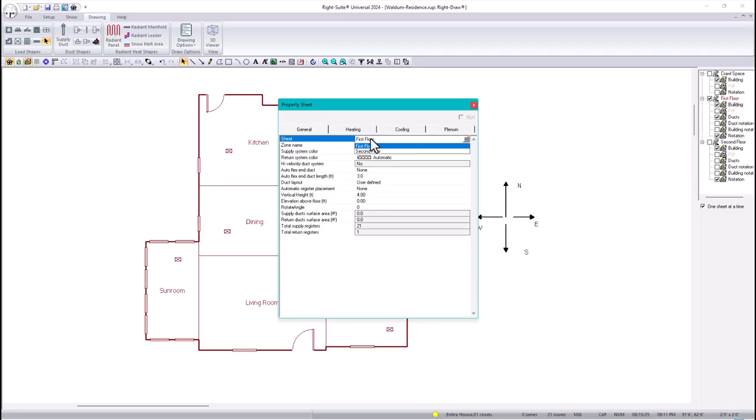So how are you going to put it? If this system is not in the crawl space, there's no way you can show or run ducts in the crawl space. There's no way, there's no option. See, I'm going to go here - first floor, no, second floor, no. Okay, let's put it on the second floor and see what happens.

See? Now it's on the second floor. It's not on the first floor, it's not on the crawl space. I want it in the crawl space. Okay, so there's a trick for that, and I'm going to show you that, and I'm going to make a video about tips and tricks for that too.

So the trick is the following: why is it not giving me any crawl space option? Because this crawl space is not conditioned. If you go here to the worksheet, see in the worksheet, what's my square footage? My square footage is 1910 square feet, because it's not including the crawl space.

Let's go double check again. Let's go to the crawl space, then go here, right click. It says including the calculations - no. As soon as you put including the calculation - yes - it's going to count this area for this square footage. Let's go check - including the calculations, yes. And then you're going to hit enter, okay, and go back to the square footage.

Oh, wait a minute, now it's almost 3,000 square feet. So that's not good, and that's not accurate, right? See, do you see entire house? It's the room area, 2,949. And let's go checking here. Wait a minute, that's not right, number one.

Number two, can I put my system in the crawl space now? Let's see - you're not going to be able to. Let's go check, second floor - no, it's not there yet. Oh my gosh, that's not good. So what happens is there's no reason for your system to be there. Why?

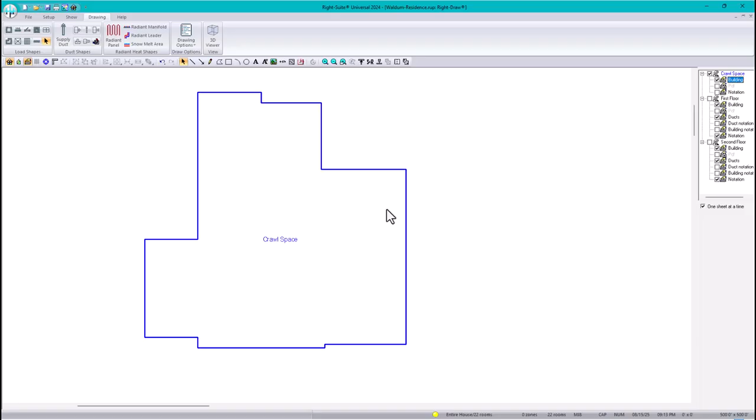Because the reason is this room is not conditioned. If it's not conditioned, there's no reason to be there. So the reason it's not conditioned is in here. Room heating conditioning, none. Room cooling conditioning, none.

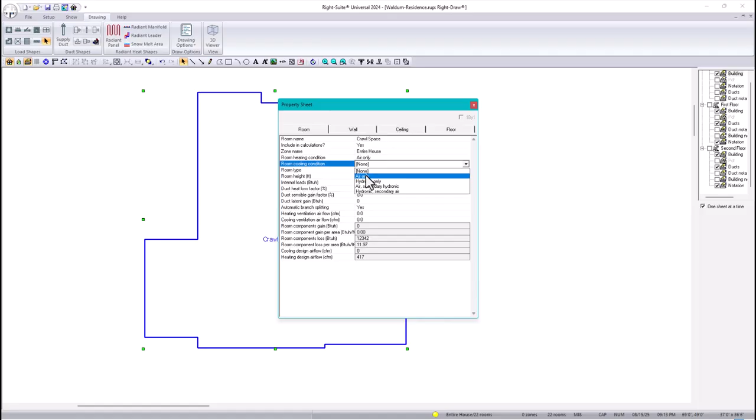So the trick is, number one, in your crawl space, you have to put including the calculations, yes. Room heating condition, air only, or whichever. Room cooling condition, air only. Okay, all right, there you go.

I understand this is not good because the entire house is going to be now almost 3,000 square feet. That's not right, but this is a trick. So let's go back again and check on my system if I can put it on the crawl space.

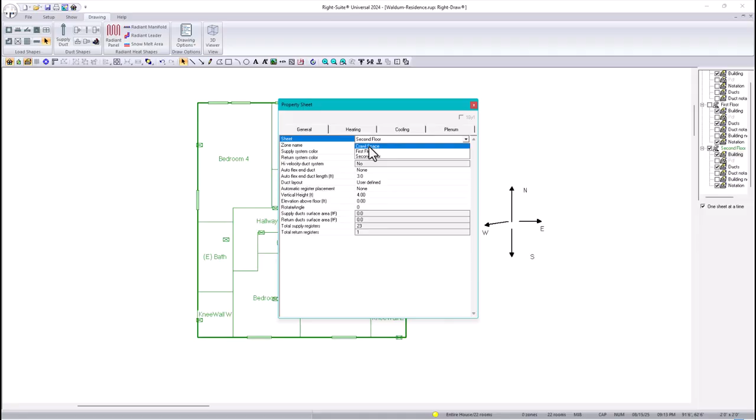I go click, second floor. Oh, look at this, the crawl space is right there. That's very good. So let's put it in the crawl space. There we go, and then hit enter. And now my system is in the crawl space.

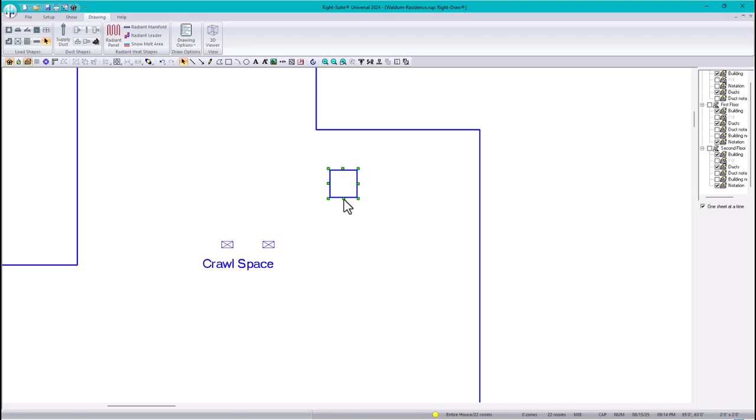Now secondly, what you're going to do is the following. In the crawl space, you need to make sure that this is looking good. I'm going to put it like this, and then make it a little bit longer. Let's see if I can make it longer. I'm going to pull this down like this. No, let's go here, and then go with this, go here, like this. See? Now I'm going to make it longer.

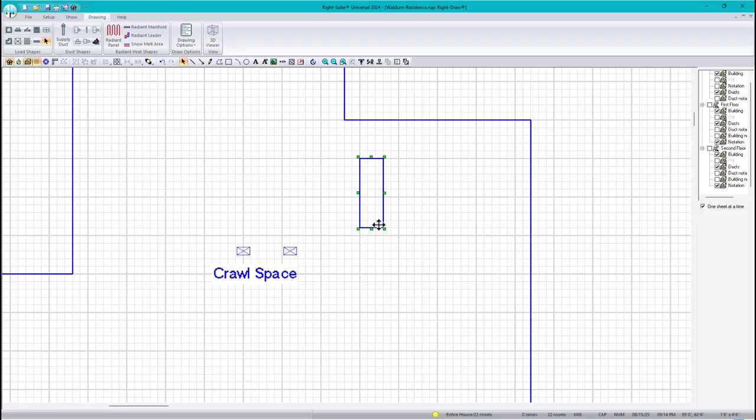So that means, or that represents, that my unit is in a position that is horizontal, right? There you go, you see, there we go. Okay, so now that my unit is horizontal, I'm going to get rid of this.

Now I could play with my ductwork because, see, in the crawl space now you have the notation, you have duct notations. Oh my gosh, look at this, it's giving the CFM needed in here. All right, I'm going to go delete this.

Okay, so in the crawl space we have that. I'm going to make this a little bit bigger. There you go. So in the crawl space you have register grills, which is not right and is not accurate.

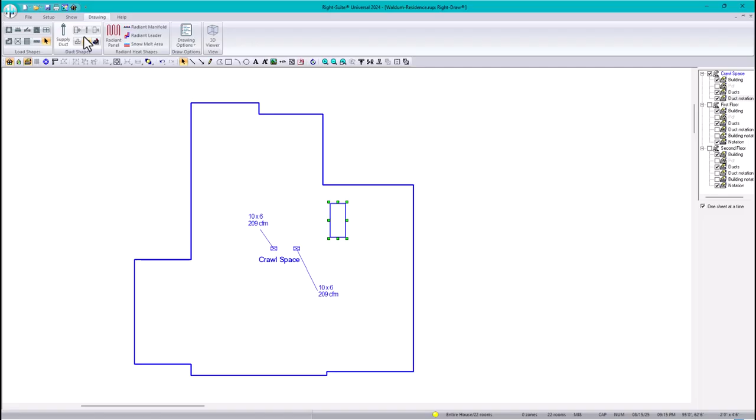But if you do this, for example, if you want to run a duct, go here. So this is the supply. Let's go like this, or maybe like this, whichever you want. So maybe you're going to make it like this. And then look at this. It doesn't connect actually.

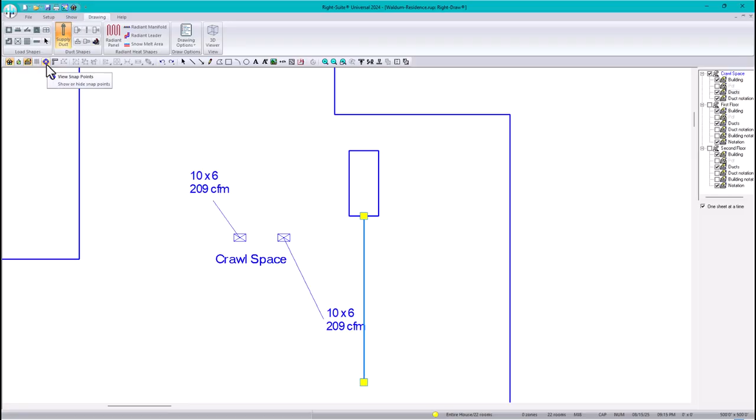Let's see, go back, and then go here. We need to, so this is what is called snap points. Snap points actually help us a lot. So I'm going to put a snap point, and I'm going to make my grid in here. No, not my grid, it's called a grid. So let's go here, and then look at this. We got this, and then it's there.

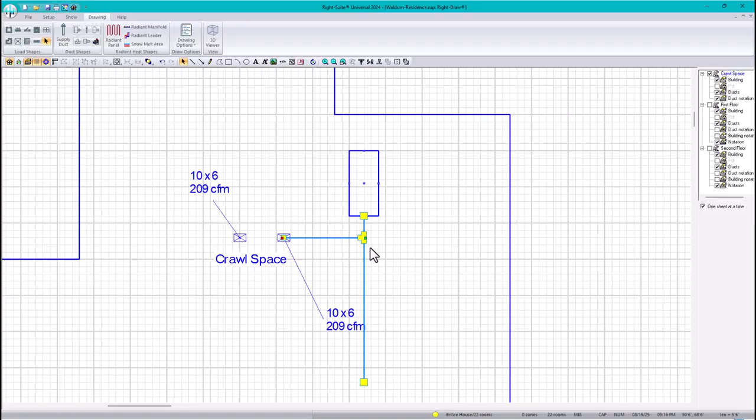Now it's not connecting. It could be like maybe some sort of, what is it called, a glitch. But let's go check again. If I do this, I do that, it's not connecting again. Oh, because I don't have a return in here. I don't have a return, I don't have anything. So I need to play with this a little bit more. It's a little bit more tricky, but that's not the point. I'm going to have other videos for that, to play with this.

But the reason is what we have to do in here is the following. Now see, now it's connected. Now what we're going to do is make sure this is not included in the calculations. In other words, the crawl space is not going to be conditioned. So this is the trick.

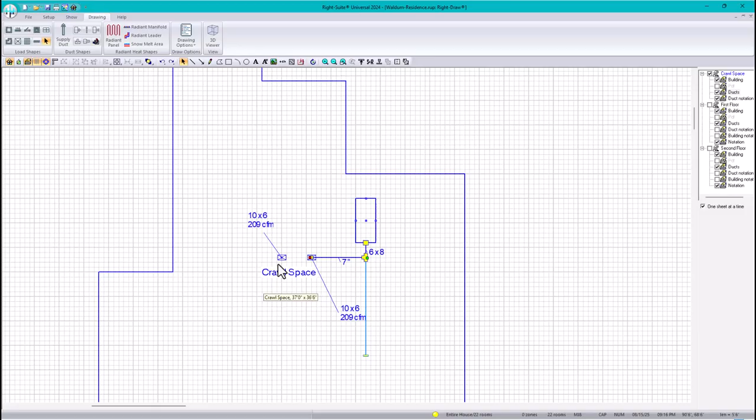I'm going to go right clicking here, and I'm going to put including the calculations, no. Enter. I'm going to put room heating conditioning, no. Enter. And then I'm going to put cooling conditioning, none. There you go, this is like it was before. There we go, but the unit is already there.

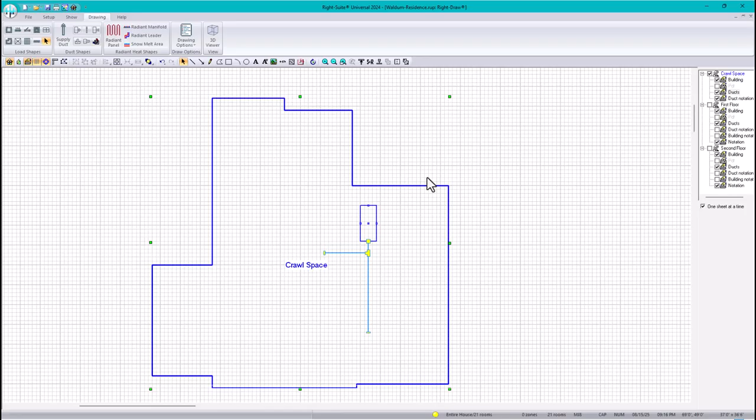The unit is there, and I'm going to go check my square footage. Go there, entire house, 1910 square feet. So we're all good, now we're all good to go do my HVAC design. All right, that was a trick. Honestly, that's a very good trick.

Now we're going to go to the first floor. In my first floor, I'm going to get rid of the grid. And now I'm going to do my design itself.

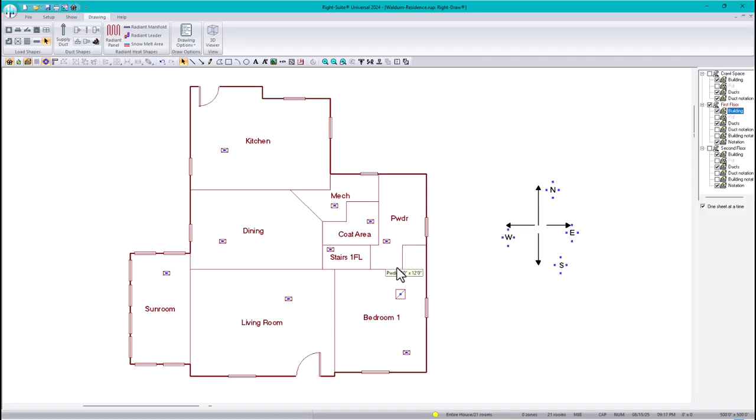Okay, so we decided we're going to do floor registers. So in that case, what I'm going to do is check on the CFM. So for the CFM, I'm going to put in here duct notation. I'm going to enable that, that's my duct notation, all right?

Okay, now what you have to do is position or place these registers. Okay, what I'm going to do is put this right here, close to the window, right there. And now let's check on the orientation actually, where is more sun in here?

Is this sunroom gonna be maybe a little bit shaded, or is it gonna have a lot of sun? Let's check on that very quick. For that, I'm gonna bring up the compass. In order to bring the compass, you go to the drawing options, you go to default construction toolbar, and there we go.

We have the north on that side. Remember, the north will be kind of shaded, so this part will be shaded, and then the south will be sunny. So this part will be sunny, this part, right?

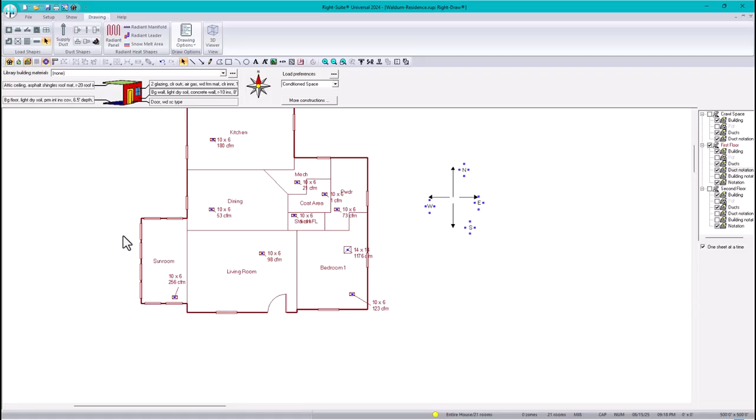So east to west, right? The sun will come this way, east to west. In the morning it's going to be sunny, and here in the afternoon is going to be the set, right? So technically the sunroom in the afternoon is going to be kind of a little bit sunny, right?

So in that case, that's why I'm putting my register here. But 256 CFM, there's an issue with that. Sometimes when the CFM is higher, it could bring up some noise. And also you want to get some more distribution, but that depends on the designer, or depends on each contractor, and each designer is different.

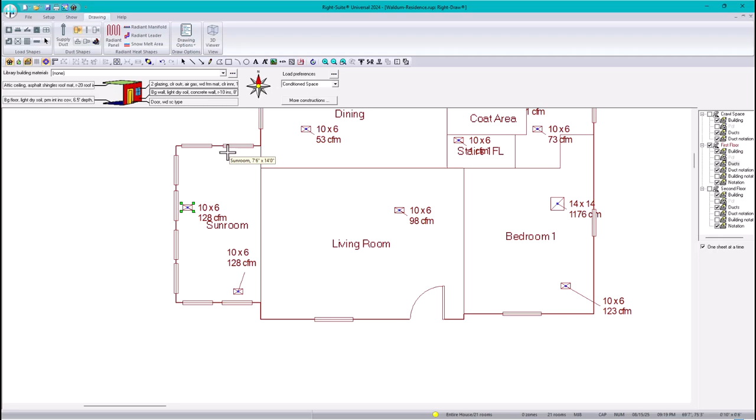So let's do this for educational purposes. I'm going to create more registers. So what I'm going to do is go here and then supply register. I'm going to put one supply register right here. And then now it's 128. With 2, I'm okay, maybe. Yeah, I'm going to be okay with 2, but it depends on the designer.

Again, I'm going to put this as 90 degrees. Go there, 128, put it there, and then put it outside. There we go. And then I'm going to put it outside. So we have now my 2 supply registers, right?

I'm going to put my living room. Of course, it's not going to be there, my register. I'm going to put it right there. There you go. So that's going to be for my living room, 10 by 6. Everything right now is like 10 by 6, but that's going to depend on the manufacturer, right?

Or the home builder. Some of them want to have only one size. Some of them want to have 2 sizes, 3 sizes. Okay, we're going to go to the bedroom.

In the bedroom, I'm going to put this as perimeter. In the perimeter, it's going to be right there. There we go, close to the window. And then, again, I have only 1, right? So there's another window here.

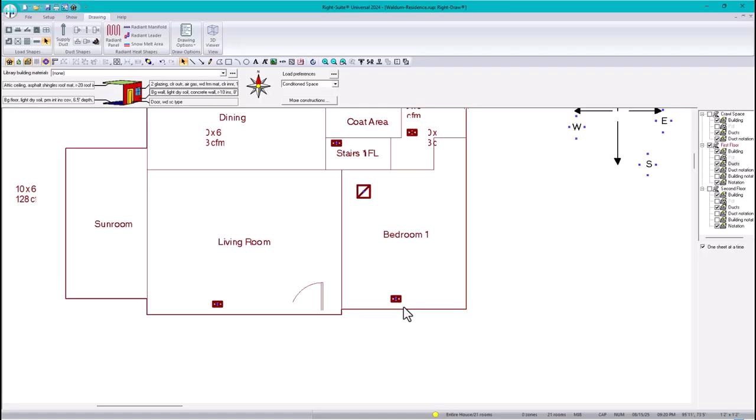So what I'm going to do is more distribution. I'm going to create another grill right there. Go here, there we go. So it's splitting the CFM, as you can see, the airflow. Instead of 128, it's going to be 61, 61.

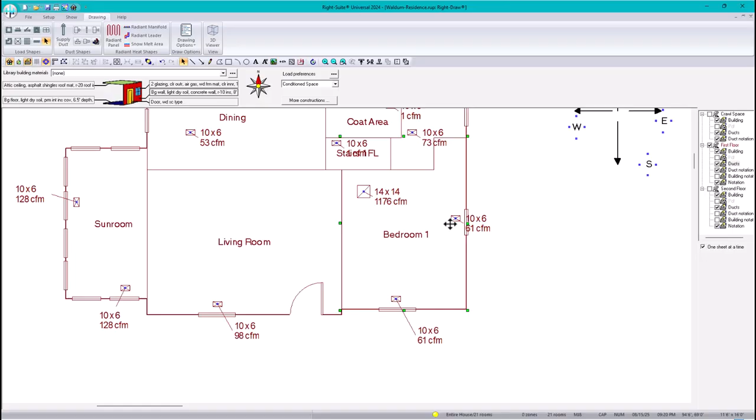I'm going to rotate this. So for rotation, another setting in here that's going to make it quicker is I'm going to lock the building. See, I'm wasting time in here, just clicking and it clicks the building. I just want to be able to click on the registers. So for that, I'm going to double click on the building and then uncheck and check to enable this again.

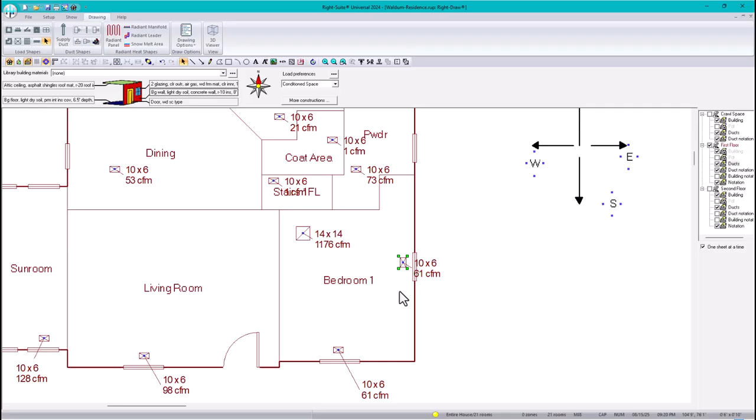Okay, so I'm going to right click, rotate angle. Yes, 90 degrees. There we go. So I'm rotating it. We're good, we're good for the bedroom now.

Now I'm going to go to the powder room. So I'm going to click here and then this powder room. I'm going to, depends, where do you want to put this? That's a very good question. So maybe you can put it close to this window, but let's see how the powder room, the small bathroom looks like.

For that, I'm gonna bring up the PDF. Okay, the PDF is right there, and the window is right here. So the vanity is right here, right? And this is the toilet.

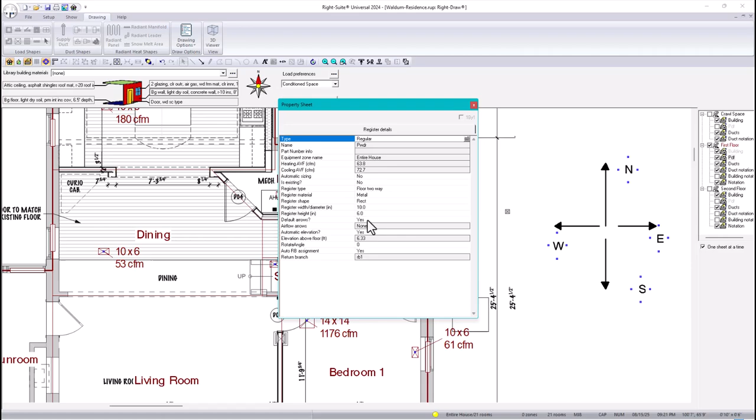So I can put it in here, or maybe closer area to here, possibly near the door. I'm gonna put it right here, right there, and then right click, and then I'm gonna rotate it 90 degrees. There you go. But that depends also on the preference of the designer again.

So I'm gonna do this, and then as you can see, we have the CFM right there. Okay, now let's go to the coat area. In the coat area, you know what, look at this, you have 1 CFM. Are you going to put for 1 CFM? I don't think so. So what I'm going to do is get rid of this. Go here, delete. Yes, there we go.

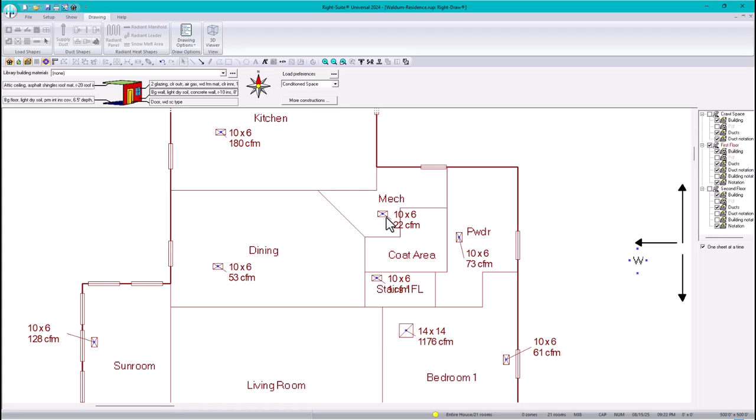Coat area, now mechanical room. In the mechanical room, we usually don't need it. We're just going to delete this. There you go. How much is it? Let's go, 22.

Okay, we're going to delete this. There we go. And it's going to redistribute the CFM to the other rooms.

Okay, we're going to go to the kitchen. In the kitchen now, this is different because the kitchen actually depends. You're not going to have just one register, you're going to have more. I'm going to create one more at least.

So let's go here, it says supply register. I'm going to create another supply register. There we go, so it splits the CFM 95/95.

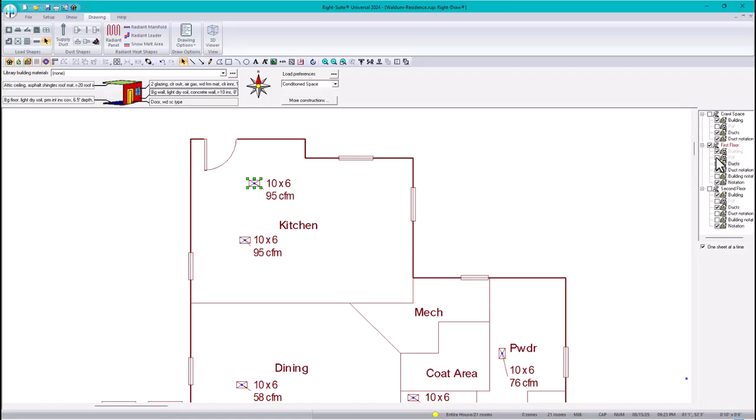Now, location, like in real estate. Let's go check down the PDF. So in the PDF, I'm going to put this close to the door right here, right there. And then I'm going to make a rotation of 90 degrees. There we go. Okay, so I'm going to put this outside.

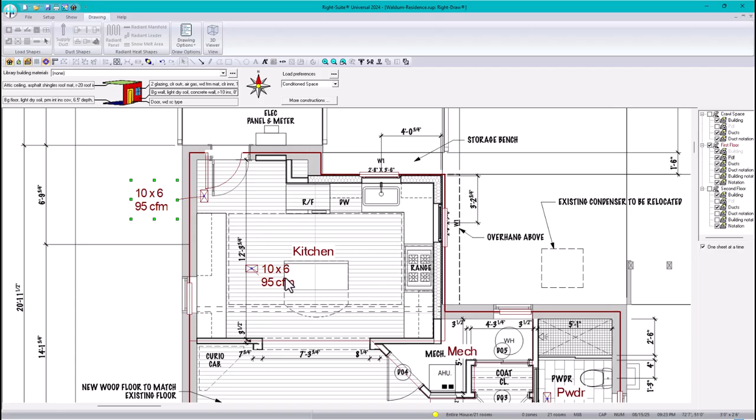There we go. Now, where do we want this to go? This is going to go close to, let's go check - this is the dining room, this is the kitchen area, this is the island. I go there, I can put it possibly right here. I'm going to put it right there.

This is very good. Yeah, see, not so close to the range. There you go. So people are going to be around, I'm going to put it right there. But that again depends on the designer or everyone's preferences.

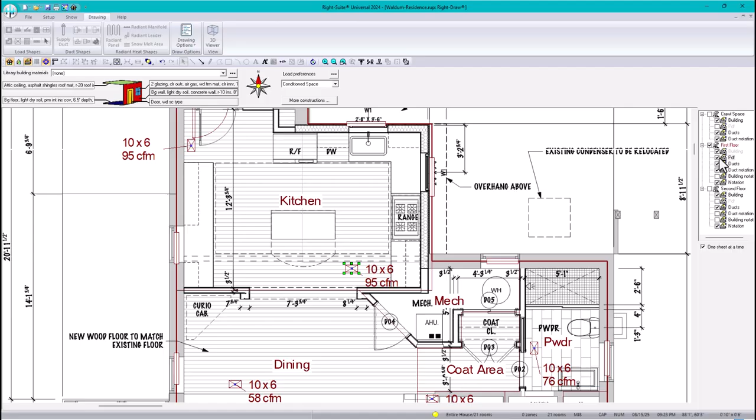Okay, PDF off. There we go. So now we have the kitchen. There we go. Now let's go check on the dining room.

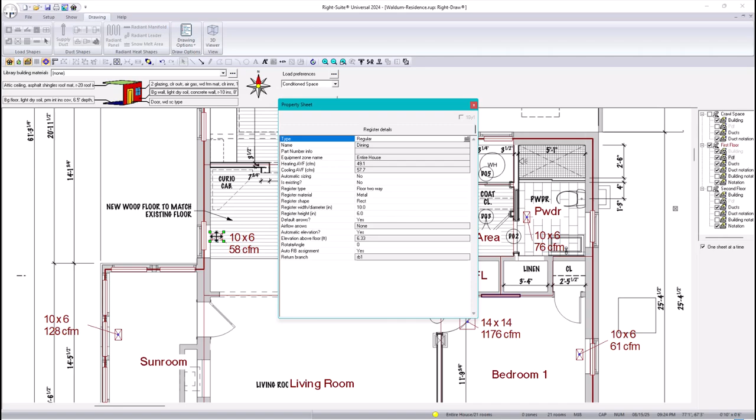So the dining room, let's go check again in the PDF. The dining room is going to be here. You don't want this to be blowing right there. I'm just going to put it close to the window. There we go. And then I'm going to right click, rotate angle 90 degrees. There you go. So I'm going to uncheck this and then put this like that.

Okay, so what else is missing? I have a, what is this? I have a stairs and this is one CFM. I'm going to click here and delete.

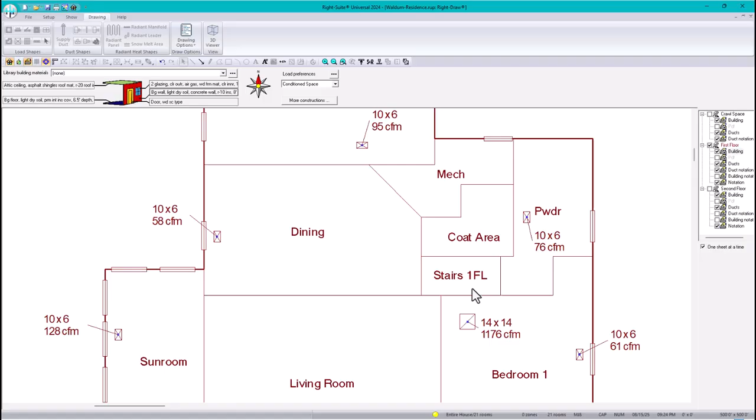Yes, all right, I think I have it all. I think I have it all in here. But we're missing out on something.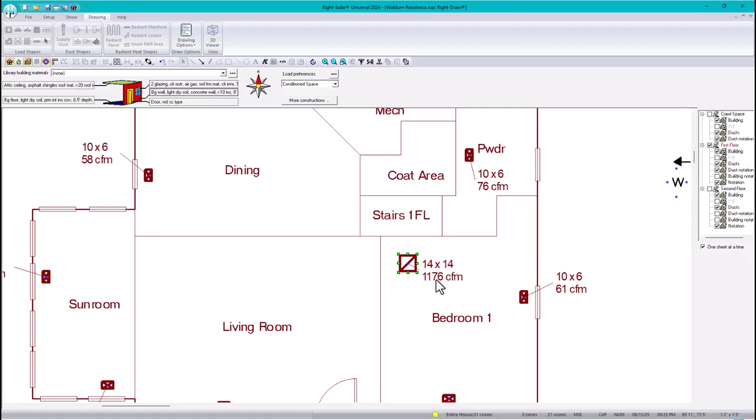The return, the return is always a tricky part. The return cannot be here, and it's not going to be a ceiling grill, and also it cannot be like a 1176 CFM. The reason is that this is accounting for all the floors. Maybe not, let's see, is it accounting for all the floors? If I click here - yeah, most likely, because I don't see any other return.

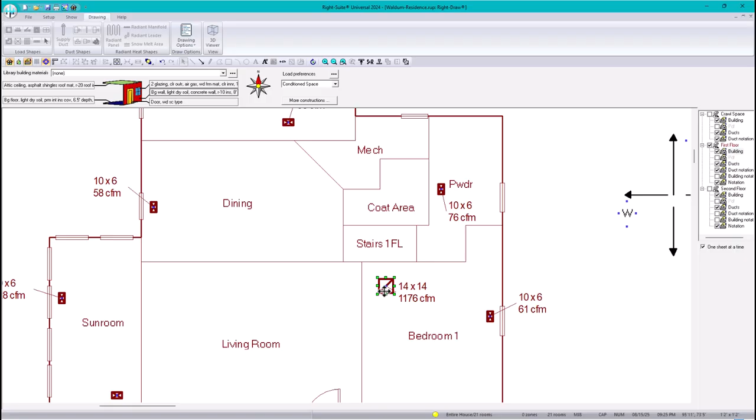Okay, so in that case, you cannot have the return here, because you're going to need a chase possibly here, and in the bedroom, not a good idea. For example, if not really in the bedroom, living room - possibly on the living room, and it's not going to be ceiling register, because then you would have to go to the ceiling and then make a duct.

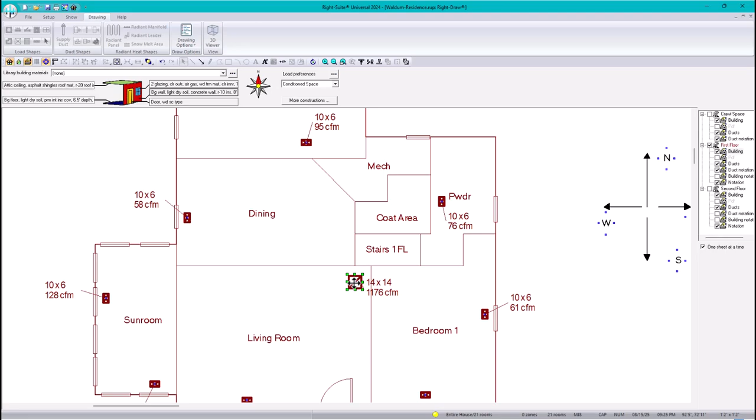Not a good idea. So what I'm going to do is I'm going to make a side wall return. For that, because in here, let's see, this return says floor two-way, right? So it's not going to be a floor two-way, it's going to be a low wall grill. We can also put a high wall grill. High wall grill, there we go. And then enter. Okay, so we have the high wall grill.

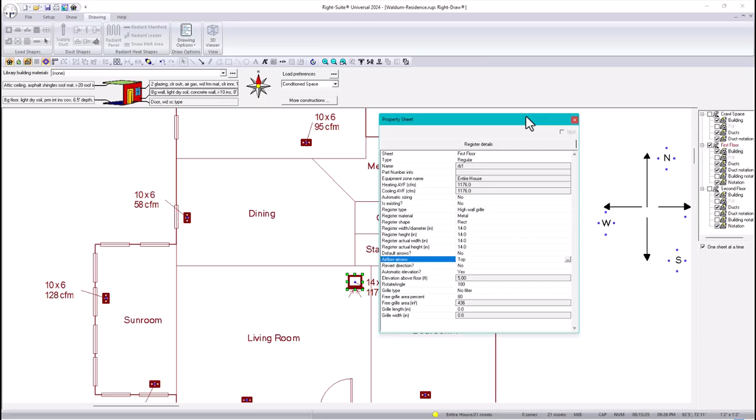I'm going to rotate this 180 degrees. And I'm going to put arrows. Default arrows, yes. Default arrows, no. So default arrows, no, airflow arrows, yes. I'm going to put towards this side. There we go, because I'm going to put this near the coat area.

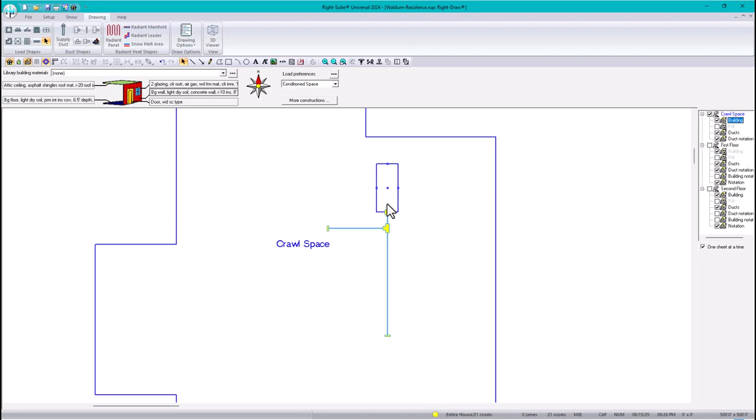There we go. And I'm going to go up, from the bottom. Because in the mechanical closet, you can always ask the architect for a chase, for a shaft. See, the crawl space is right there. And I'm going to align this to the first floor. See? So in that case, I'm going to align this to the first floor, to make it paired with that. Okay, so as of now, everything is looking good for now.

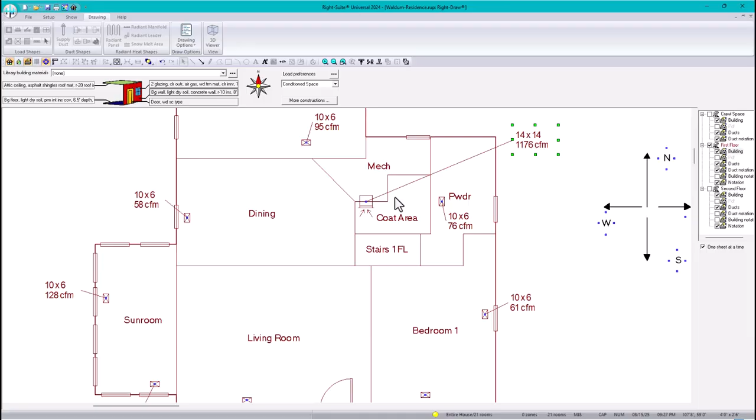So I would say my first floor is ready. My registers for the first floor are ready. And also in the crawl space, my unit is right there, ready to be connected, right?

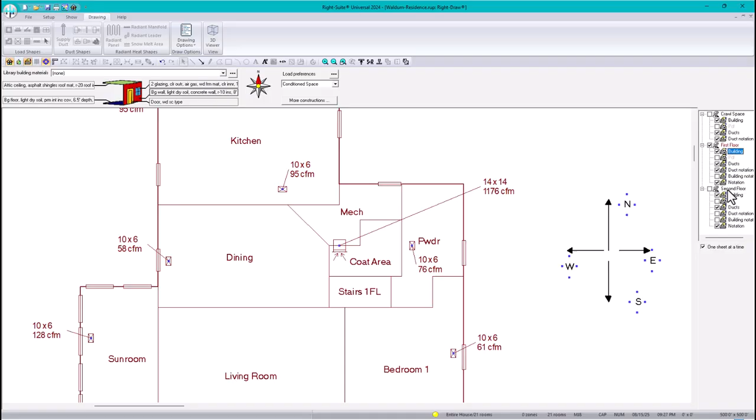Okay, now what we're going to do is I need to prepare the second floor too. Okay, so that's going to be actually for the next video, because I don't want to make this video very long.